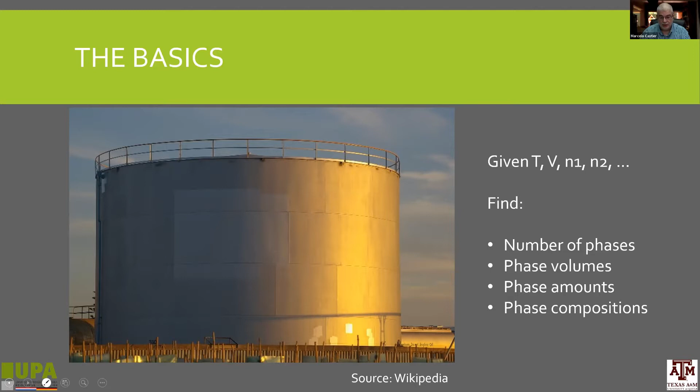For example, if you have a tank, but now this tank is leaking, so there is a leak from this tank. In a situation such as this one, in addition to knowing the properties of the fluid within the tank, the same properties as we discussed before, the phase amounts, volumes, compositions, and so forth, you also want to know the same information for the fluid that's leaking from the tank. So if I want to do a kind of forecast of what might happen during an industrial accident, this information is very important. I want to know the flow rate and the composition of what's leaking.

So to do that, in addition to solving a flash TV and flash, I also need other properties such as the thermodynamic sound speed, and I need a flash with specifications of entropies, amounts, and stagnation enthalpy, and I'll come to that later on. Where else does it matter?

For example, it matters when I'm trying to do compositional grading, depending on the approach that I take. Again, if I think that I know the volume of my reservoir, the temperature, assume it's isothermal, the component amounts within it, and I know the height of the reservoir, I can now account for the effect of gravity and calculate, again, the number of phases. In principle, I know the phase volumes and the amounts in phase compositions as functions of height, function of level, function of position.

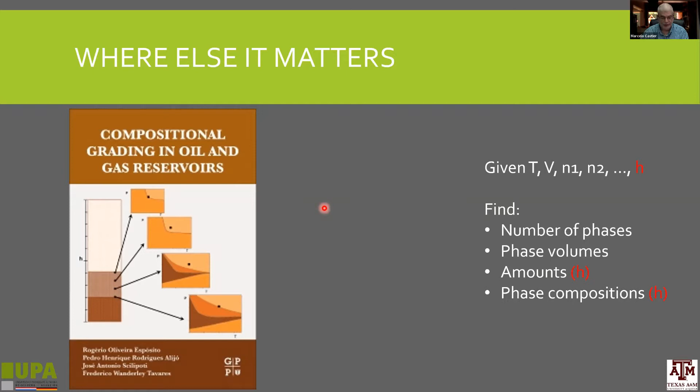In a problem such as this one, with specifications of temperature, volume, and component amounts, basic thermodynamics tells us that the state of equilibrium can be calculated by minimizing the Helmholtz energy compatible with the internal constraints of the system. Of course, the internal constraints play a role. If it's free, with no membrane or anything, then it will just be a kind of phase equilibrium with specifications of T, V, N, and I can solve this problem by minimizing the Helmholtz energy.

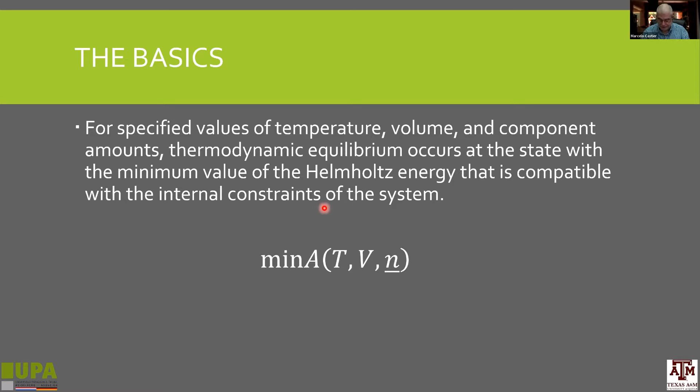But the problem of minimizing the Helmholtz energy is normally solved assuming a certain number of phases. If you assume, say, 2 phases within the system, then you find out what distribution of the components and of the phase volumes will minimize the Helmholtz function.

But it's not always the case that I know how many phases exist. In some cases it's trivial, in others it's not. For many years now, phase equilibrium calculations embed the phase stability test. In the case of the Helmholtz energy, we can derive this phase stability test using different thermodynamic potentials. Michelsen's work of 1982 used the Gibbs energy, but you can replicate that type of derivation using other potentials, starting with entropy, internal energy, or in this case an expansion of the Helmholtz energy.

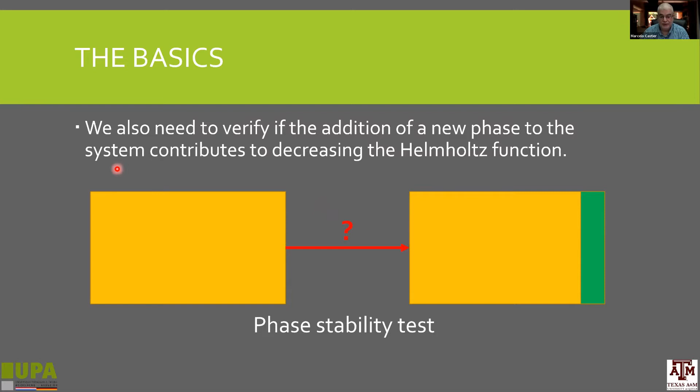So the problem is whether I can start with a one-phase system and then split it into a yellow phase and a small amount of a green phase, but conserving the volume. So I now have a constraint that the volume of the original system and of the system after partition have to be the same. This leads to a formulation of the phase stability test based on the Helmholtz energy.

If I have a way to minimize the Helmholtz energy and I have a phase stability test, regardless of the mathematical details of the implementation of each, I can start thinking about putting these elements together and creating some useful tool.

As, for example, a flash algorithm that would minimize the Helmholtz energy, accounting for the possible inclusion or exclusion of phases. The traditional way of doing these calculations is you start with a number of phases. I put here 1 because if you have a system with chemical equilibrium, you need to minimize the Helmholtz energy for a single phase chemical equilibrium. If you do not have that, then you don't need to minimize the Helmholtz energy for a one-phase system, because there is no alternative. But either way...

What happens next? If you start with one phase, you test the stability of the system, the thermodynamic stability. If the system is unstable, you add a phase to the system and repeat the exercise of minimizing the Helmholtz energy. Especially when doing calculations close to phase boundaries with systems with more than 3 phases, it's necessary to test for the possibility of eliminating a phase, which would lead to a decrease in the thermodynamic potential.

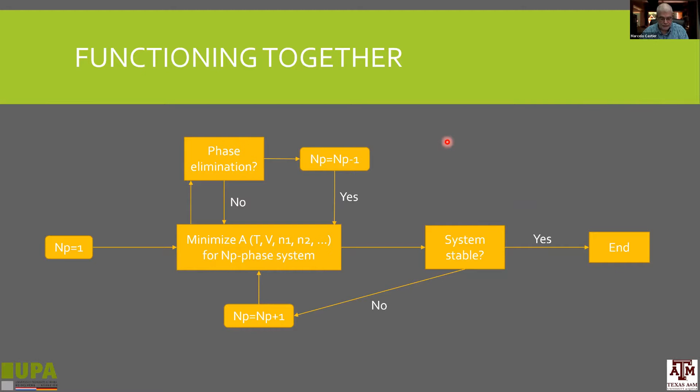As we move through this presentation, my goal is not to go deep into the details of the numerical implementations, but rather to highlight some points that lead to applications. The title had to do with applications, and that will be my emphasis, not so much the numerical details, but we can discuss them later if there's any specific interest.

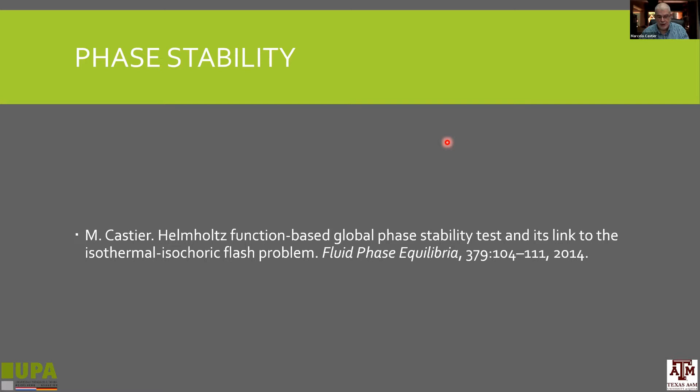Now on calculating phase stability based on the Helmholtz energy, what you can do is basically replicate the way it was done by Michelsen for the Gibbs energy in the 80s, accounting for the fact that you need to have volume conservation. Remember, the volume of the single phase and the two-phase systems have to be the same, so you have to account for volume conservation.

Then you have a phase stability function that is the difference of the chemical potential of the incipient, trial phase, minus that of the phase already present, times the amount in the incipient phase, but also you have this contribution that comes from the pressure difference. Now, regardless of whether you specify T, V, N or T, P, N, if a certain state is unstable, it's unstable, regardless of the specification you made.

In terms of identifying whether the system is stable or unstable, doing it the way shown on this slide, or doing it like Michelsen did and proposed years ago, you get exactly the same answer. You have to. If you don't, something is wrong, because regardless of the specifications, if a system is unstable, it is unstable.

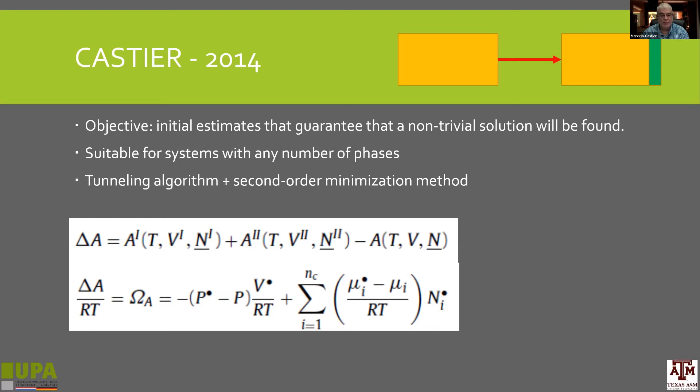So this is not how it was done here. It uses an empirical method called stochastic tunneling, combined with second order minimization. There's no guarantee we'll always get the minimum, but there's a good probability that it does.

In this work, I compared with another algorithm published by Professor Firoozabadi and his group, and got near perfect agreement with his results. There is one discrepancy: some of the results he showed in his paper with his group have not only transition from 1 to 2 phases, but also from 2 to 3 phases.

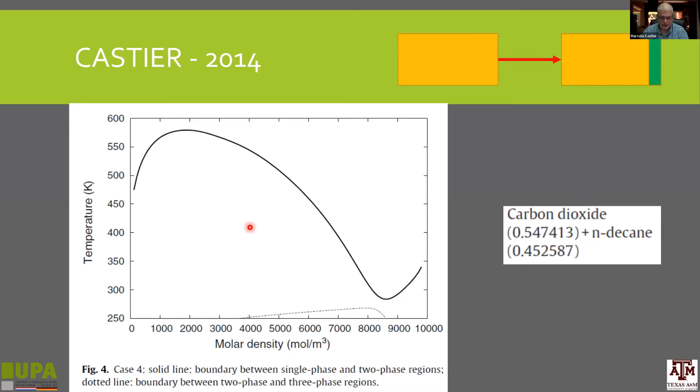This is one example with three phases. Here's another one that also shows three phases. I picked out those that had 1-to-2 and 2-to-3 phase transitions as the outcome.

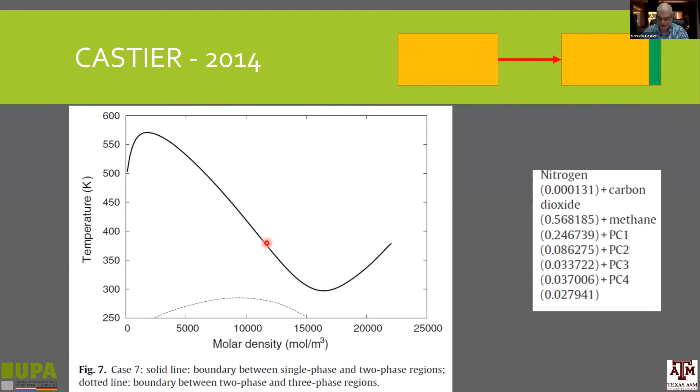Now, all of this started because of Rogério Esposito, who was a PhD student with Frederico Tavares and myself around year 2000 to 2005, this period, the early 2000s. He worked for Petrobras at the time, and still does, and he wanted to calculate compositional segregation. He became a very well-known specialist in this topic. But at that time, we wanted to do an isothermal calculation.

The way we did it was as a TVN flash, with the effect of gravity. If you have a smooth transition as the outcome of the effect of gravity, you need to integrate the value of dA over the whole region. This is essentially impossible to do analytically with any realistic or practical equation of state, so it has to be discretized. This was the approach we took: to create discrete layers and add the effect of each of these layers.

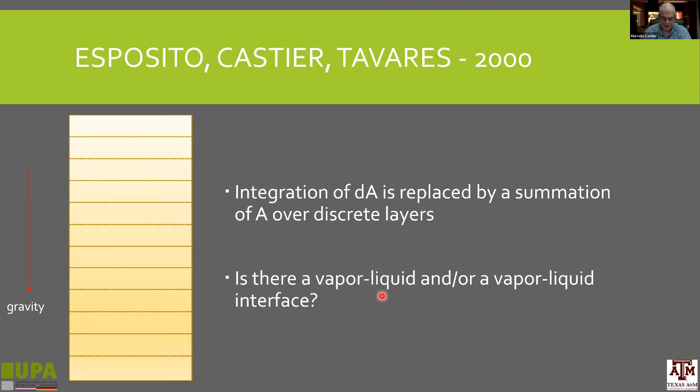Then there is the question: is there a vapor-liquid or a liquid-liquid interface? That's what we wanted to find out. So we wrote the Helmholtz energy of each layer, added the effect of gravity to the chemical potential, and added the effects of all the layers to get an approximation to the Helmholtz energy of the whole system.

Then we adopted a dual loop strategy. In an outer loop, we tried to locate the phase interface, using a very simple numerical method like simplex optimization, because we wanted to find out whether we had the vapor-liquid interface at this level, or maybe at this other level.

Why is positioning the level interface so important? It's very important because if the interface falls in the middle of a layer, the density of this layer will give rise to a negative pressure, for example, giving an unrealistic pressure profile. So positioning the interface exactly is of crucial importance.

The approach we took at that time was to have two loops. In one loop, we locate the phase interface, and then we discretize, creating discrete elements for the liquid and discrete elements for the vapor. We then use a TVN flash to find the distribution of the elements within the phases.

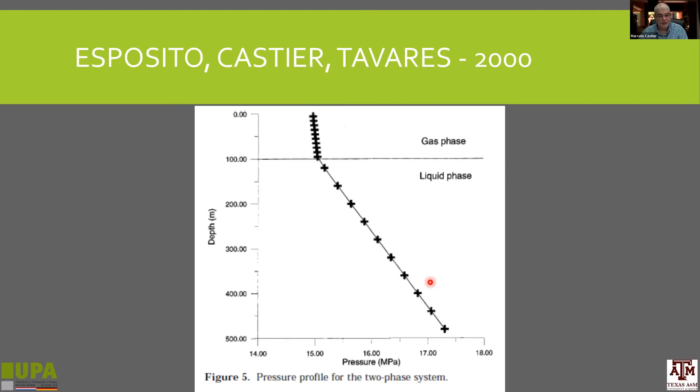These are pressure profiles with depth. Here is depth on the vertical axis, and pressure on the horizontal. We have very small pressure change with depth in the gas phase, and then when we cross the interface into the liquid phase, we get a much more pronounced pressure change. It looks like a straight line, as if the liquid were incompressible, but we didn't make that assumption—it just comes from the equation of state as it is.

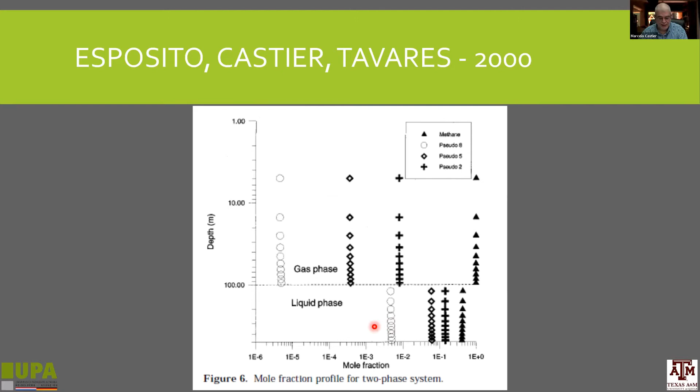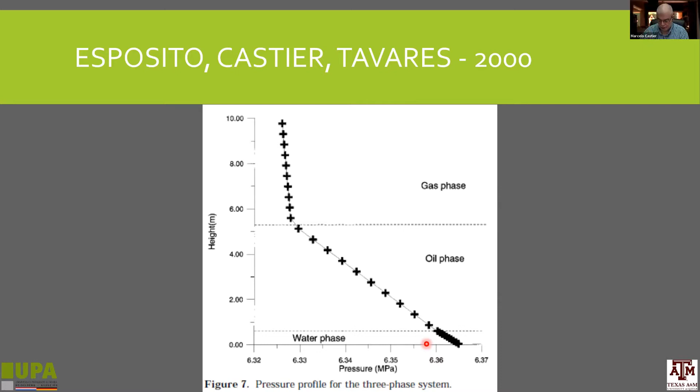Now, we had this tool, and a paper appeared in Chemical Engineering Science by a group in Shell Research, in which they did molecular simulations of gas centrifugation. The idea was to purify natural gas using centrifugation, and they did molecular simulations. Fred and I said, okay, we can do it with our program, let's do it.

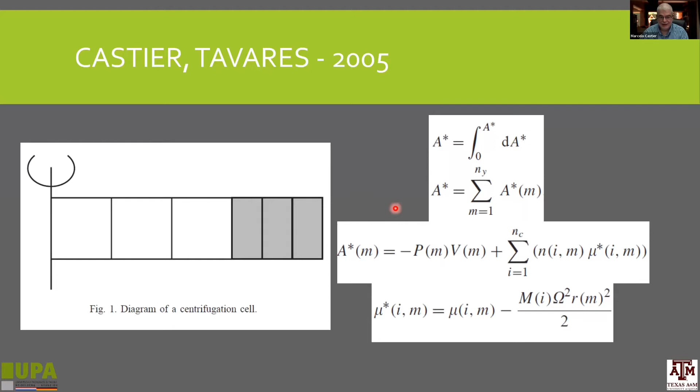We got the results in about 3 days. What did we do? We had a vertical cylinder, now we have a horizontal cylinder. What changes from one calculation to the other is how the effect of the external field—now a centrifugal field—affects the chemical potential. Off we go, using exactly the same idea, exactly the same approach. The results we got were a nearly perfect match with the results of molecular simulation from the Shell Research group.

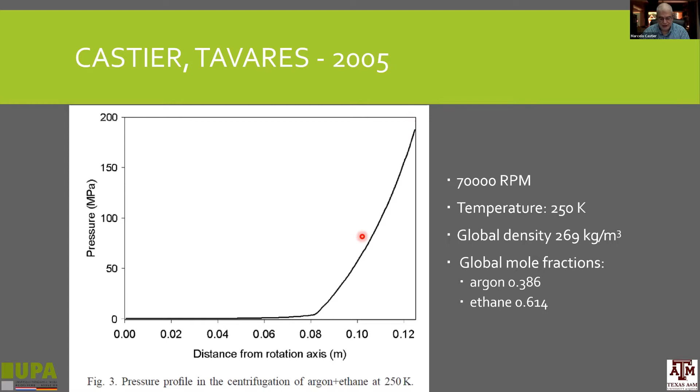And we could get composition profiles. The basic idea of using ultracentrifugation was that in the outer layer away from the rotation axis, you could get enrichment of the heaviest components—in this case hydrogen sulfide and carbon dioxide—and this is exactly what you see here. This was an immediate application of the work of Rogério, just by switching from a vertical to a horizontal geometry.

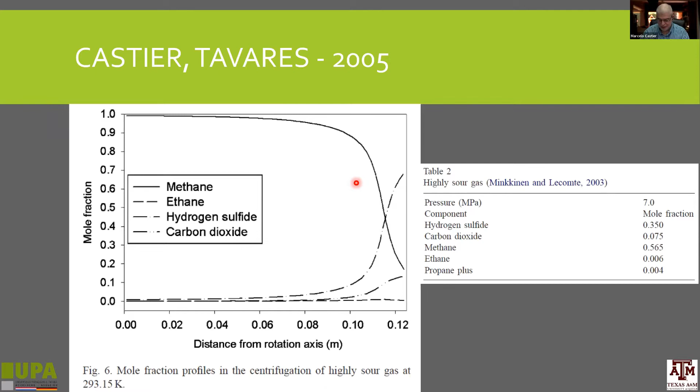Then we got excited and decided to go beyond hydrocarbons and play with colloidal particles, very small particles called Percoll. Percoll is used in biomedical separations—small particles of silica coated with a polymer. When you run a Percoll gradient, you separate different parts of cells, organelles.

I took this picture just as an illustration. I think these colored bands show how, depending on the density, the particles get together—they are separated essentially based on density.

So we formulated this. This time we used an equation of state for spherocylinders, developed by Professor Silvio Canuto of the University of São Paulo. He had just developed this equation of state.

We used this one, similar to the centrifugation problem, with one important difference: we made this calculation assuming we had the McMillan-Mayer system, in which our assumption is that we had a wall permeable to the fluid, to the solvent, such that it had a reservoir of the solvent, and then the solutes were modeled within by means of the equation of state.

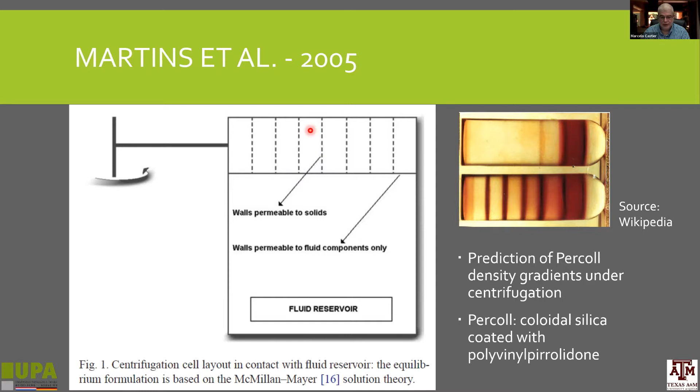Because of that, we had to use an effective mass for the particles, which was the mass of the particle minus the mass of the solvent that would be occupying the same volume—basically buoyancy.

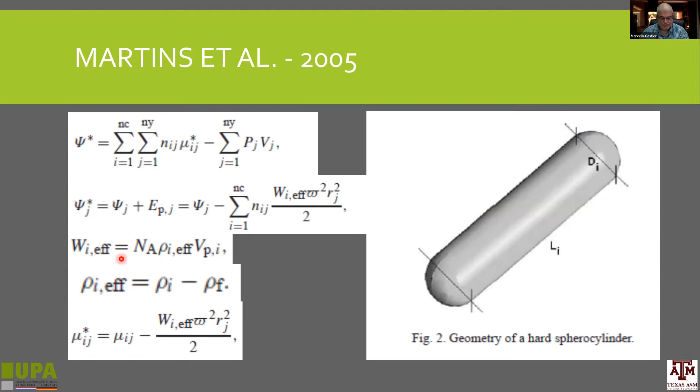Off we went with these calculations, and these are comparisons of the results from this sort of TVN flash with Monte Carlo simulations. The results for hard spheres here are essentially identical, with exceptions at the edges because of edge effects in the Monte Carlo simulation, but in the bulk of the system the match is essentially perfect.

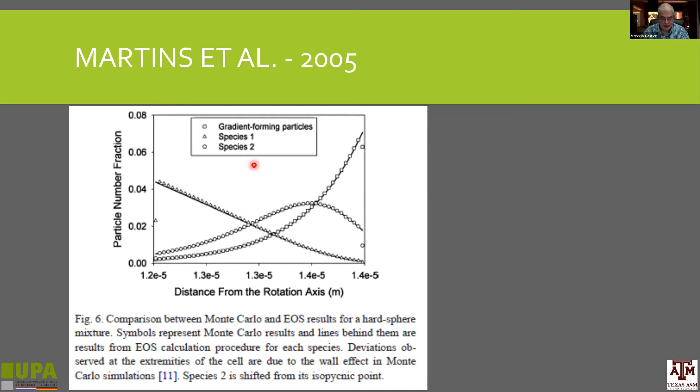This sort of banding that occurs in experiments—here we did a simulation. These are particle numbers against distance from the rotation axis, and here is the particle number of the Percoll particles, the particles that form the gradient. Here are different particles with slightly different densities and how they would create peaks, and that's exactly what we see.

Now, we cannot compare quantitatively—this is just a picture I took yesterday while preparing, so there's no quantitative comparison, but there's a qualitative comparison: you get peaks according to density. The least dense particles have a larger spread, and they become more focused, a narrower distribution, as the particles become heavier.

Everything just makes sense. Now, this program was used for many years, and then in 2016 it became so complicated to make changes—because so many people had worked on it, including myself—that it was really difficult, so we decided to have a new beginning in 2016.

So we wrote an entirely new code for volume-based calculations, allowing for multiple regions. For instance, if I have a porous material with a pore size distribution, I can say pore type A is a region, pore type B is a region. So I have this flexibility with dynamic memory allocation for different regions, different components, any number of external fields, more than one field in a given direction, and fields in perpendicular directions as well.

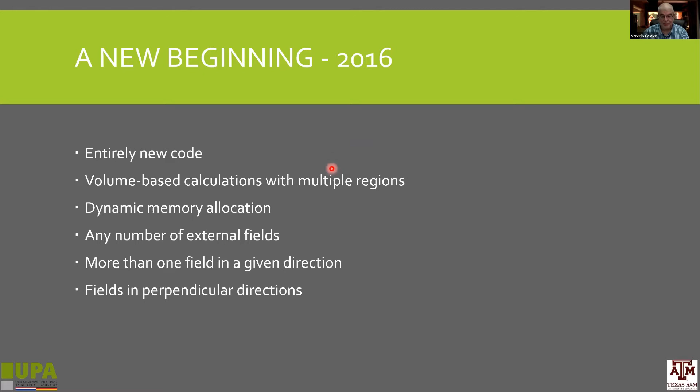We were megalomaniac at that time, and we called the program Mega TVN, the name by which it goes to this day—even though reality has shown it's not so powerful as originally intended, but the name remained. The first work with this was with Professor Yannis Economou and two Master of Science students.

So this was kind of a picture of what we had in mind: the ability to have, for example, the white region as a bulk fluid, a green pore, and a red pore—three regions—and the program can handle them all, including the possibility of gravity along with the effect of an external wall.

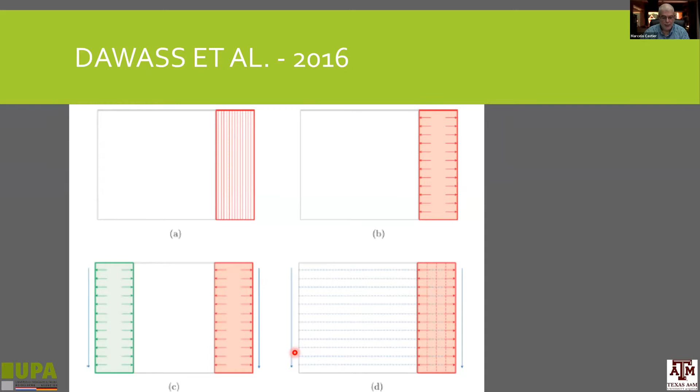In this development we also account for replicas. So again, a pore size distribution: I have a certain pore, and say 10 to the power 6 of that pore, and then another pore with 10 to the power 5—a different population of pores. All of this is accounted for, all these possibilities.

But again, it's the idea of adding the contributions of discrete layers of the Helmholtz function—discrete contributions of the Helmholtz function over layers, and now over regions.

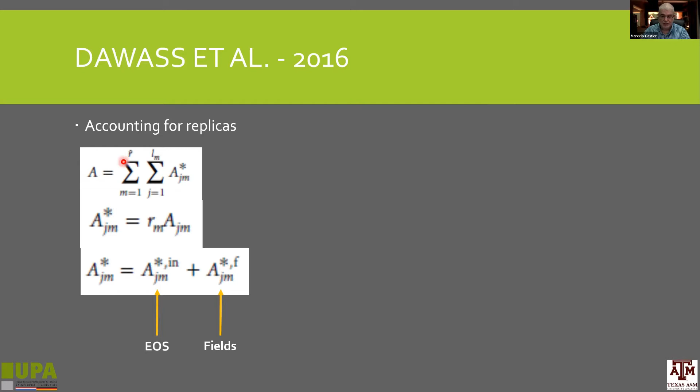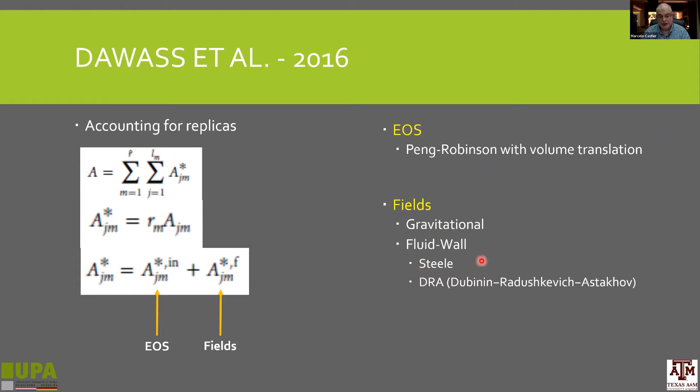In our work, we used Peng-Robinson with volume translation, and we considered two types of fluid-wall interactions and gravity. This is not actually what the program is meant for—it's not meant to be a replacement for molecular simulation, absolutely not. There are several severe limitations to doing that, but this kind of gives the qualitative idea of the type of result we get.

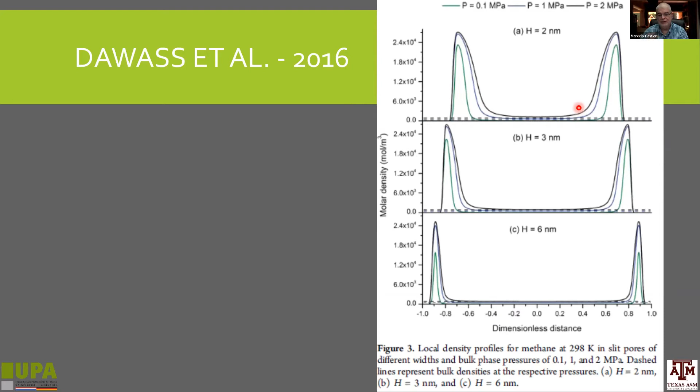So it gets an internal profile within the pore. Again, not meant to be a quantitative comparison, but it gives the right trend, points in the right direction. Now, what it's meant for is to compare macroscopic properties.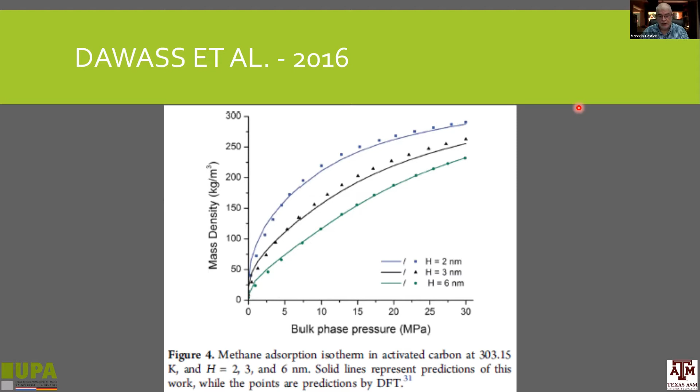Just for the sake of illustration, in this calculation we did, this particular plot is a result in which we used fluid wall interactions and gravity, so we had two fields acting on the system at the same time in perpendicular directions.

Here is the local mole fraction of CO2 within the pore as a function of distance from the wall at two different depths. So here we see the effect of depth and confinement together at the same time.

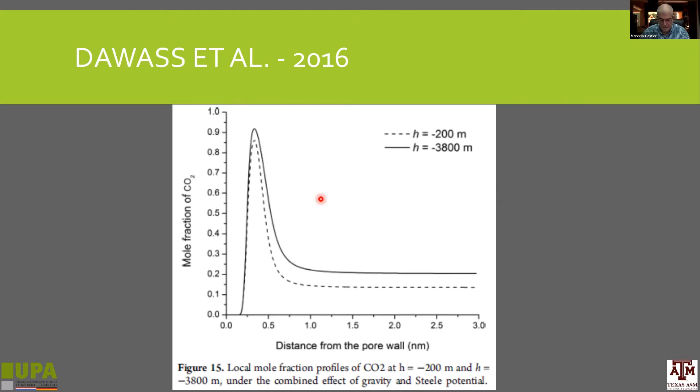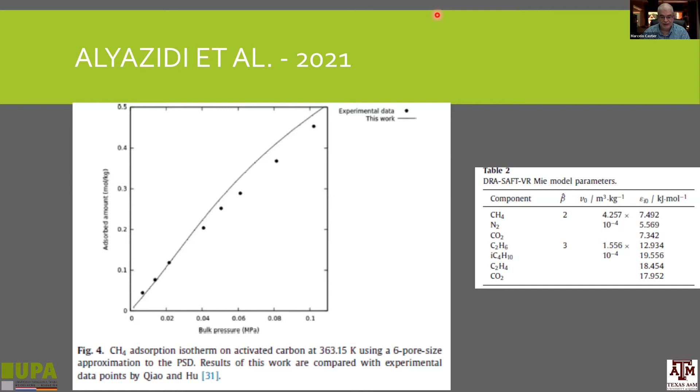More recently, we extended this work using the SAFT-VR Mie equation of state, and we have made comparisons with systems in which we took into account pore size distribution, so the ability of taking into account several regions. Here is an example of what we get for the adsorption of CO2 on activated carbon compared to experimental data.

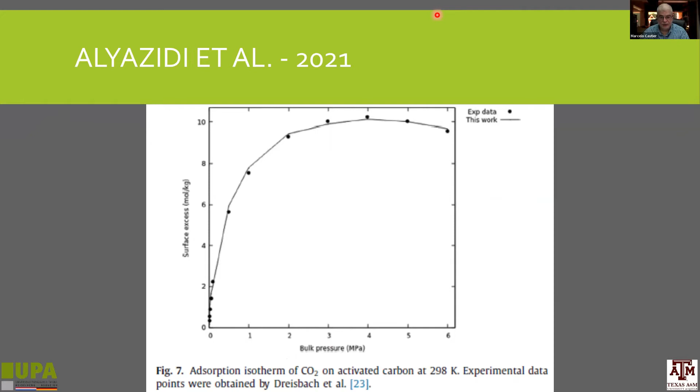Now let me move on to applications to process safety. Process safety is a very broad subject, very interesting, that goes all the way from applied psychology, trying to understand why people take safe or unsafe actions at the workplace and in their daily lives, but also includes very technical subjects. In particular, I have been working with Professor Luc VÉCHOT from Texas A&M University for a number of years on fluid releases from pressurized vessels.

There are two situations: you may intend to do that if you are opening a relief valve, so you have an overpressure and you want to relieve the pressure, or it may be an accident, an industrial accident. Either way, trying to understand what happens when there is a fluid release from a pressurized vessel is a very interesting problem of practical importance.

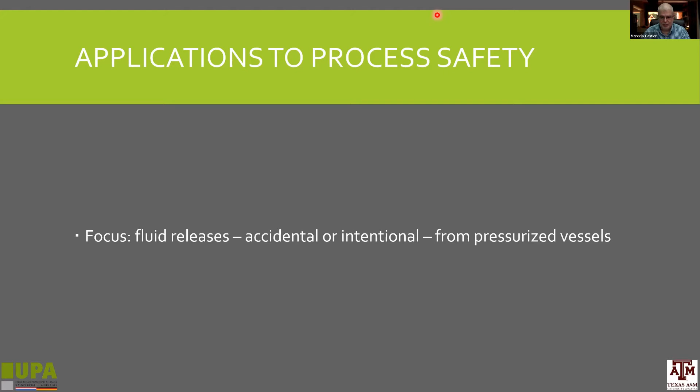Now, what I'm going to show you are some results, kind of the Lego bricks that went together into the simulation of venting and leaks from reactive and non-reactive systems.

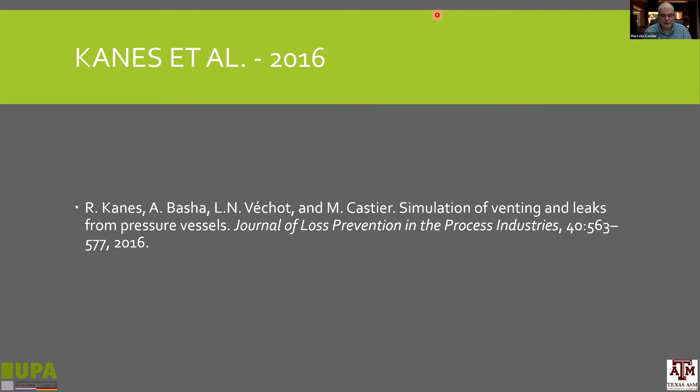The first thing that's not necessarily easy or obvious is to find out what phase is leaking. My drawing skills are terrible, I'm sorry for that, but I think this image still conveys the message. Suppose yellow is liquid and white is vapor. Let's say at the beginning of a leak, you have a leak from the liquid phase, and then as material leaves the vessel, there will be an interval of time where you have leak from both phases at the same time, and after a longer period, the leak will be from the vapor phase. This has a dramatic impact on the composition and flow rate of what's leaking.

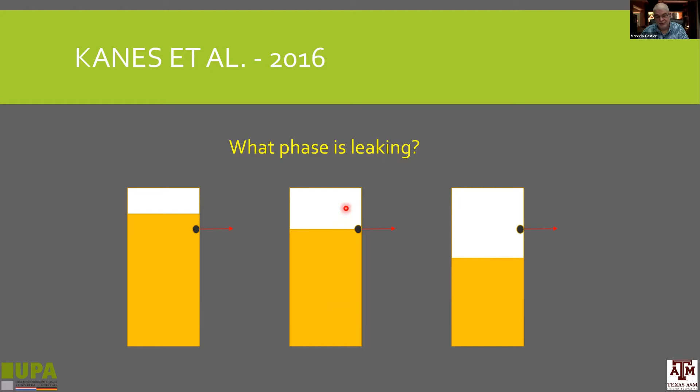In a vertical cylinder it's very easy, there is a simple relationship between volume of liquid and level, because the volume is the area of the base times the height. Not so easy when you have a horizontal cylinder, because the cross sectional area changes as the level changes, or when you have a horizontal cylinder with hemispherical or torispherical caps. So the relationship between volume and height is not trivial.

In some cases you need to do even numerical calculations. If you have the volume and you want the height, you need to do some trial and error, some Newton-Raphson calculation to find it out. It's not necessarily trivial.

Anyway, here what we did was first to formulate a mass and energy balance for a leaking tank. Let's think that the green streams are the normal operating streams, one feed and two normal outputs, and then there is a leak, which is the red output. I need to do a mass balance on a molar basis, so it's flow in minus flow out.

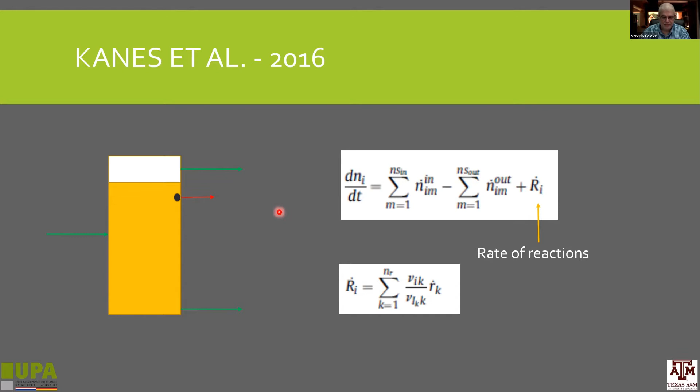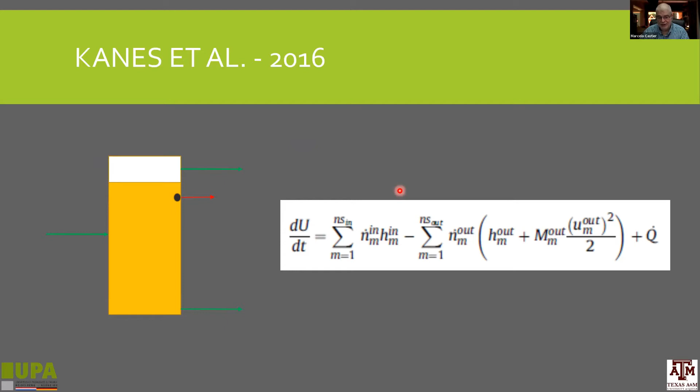If I have reactions in the system, there is a reason why this is very important or useful: now I need to account for the rate of reaction. So I need to write a molar mass balance for each component, a differential balance, and an energy balance, again accounting for the enthalpies of the streams coming in and out, and eventually some heat load. Specifically, I put the kinetic energy term in the outstreams because it may be very important, not so much for the regular streams, but for the accidental leak, as I will comment later.

Now, again, what I need to do is integrate a set of differential equations. I cannot do this analytically for the most practical cases, but the integration will give me, at each moment in time, the values of the internal energy, the component amount, and the volume is fixed. So I know U, V, and N.

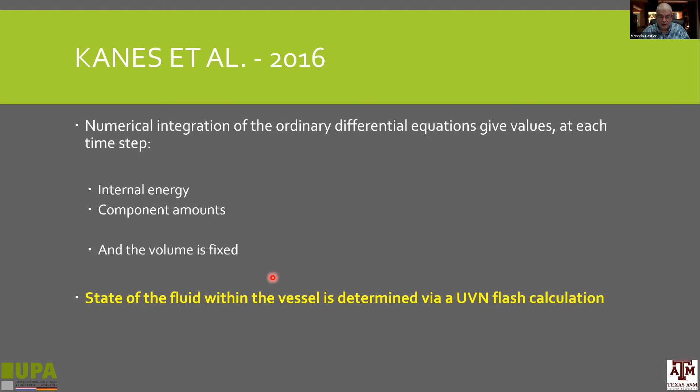If I assume that the properties within the tank are uniform, I have to solve a U, V, N flash, a flash that requires entropy maximization. I'm not going into the details of this calculation, but this was something I worked on in 2008, 2009, and this came out as a publication in Fluid Phase Equilibria.

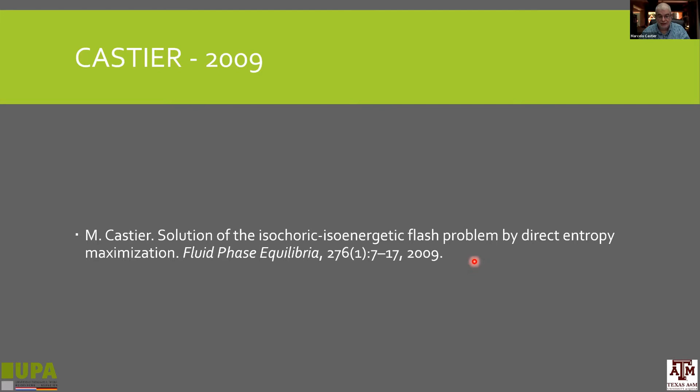Another thing that I need to worry about is the leak flow rate. The way it was modeled in this conventional model is to assume that the leaking point is at steady state, and it is a converging, adiabatic, isentropic nozzle. If this is the case, then the enthalpy of the fluid inside the tank has to be equal to the enthalpy of the fluid that leaves the tank plus the kinetic energy.

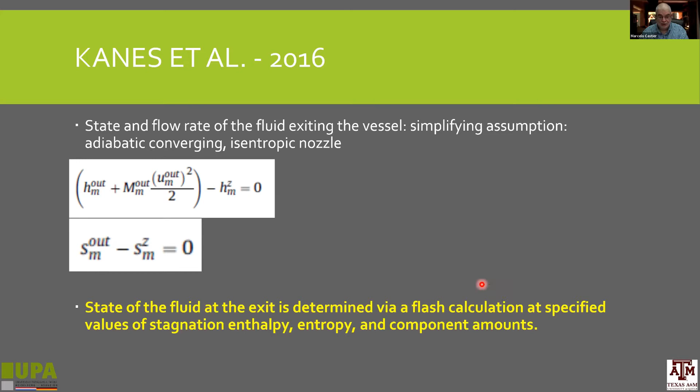Assuming it's isentropic, I have a problem in which I have an enthalpy specification, an entropy specification, and this is a flash with specified values of stagnation enthalpy, which is summation of enthalpy plus kinetic energy, stagnation enthalpy, entropy, and component amount—an HS flash. Because we had that problem, we set out to develop an algorithm to do that.

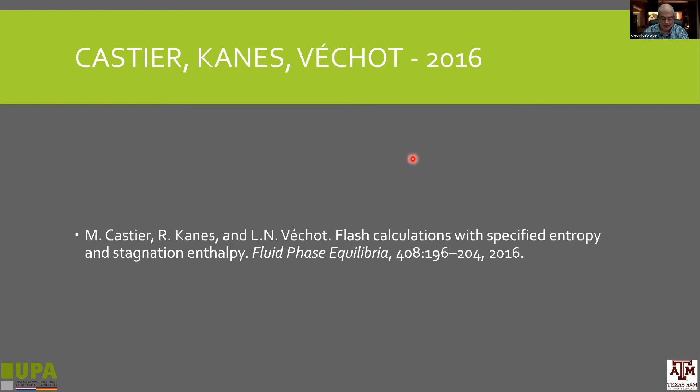I'm not going to discuss the details of the algorithm, but I may have two situations: a subsonic flow or a sonic flow. So there's energy balance, entropy, mechanical equilibrium, phase equilibrium with equal chemical potentials. If I have a sonic flow, the kinetic energy of the output stream depends on the sound speed, and the output flow may not be just one phase—it may have more than one phase. This creates the need for another algorithm to calculate sound speed in systems with more than one phase. It's like a chain of things you need to put together to simulate a leak from a tank, such as those we are trying to do.

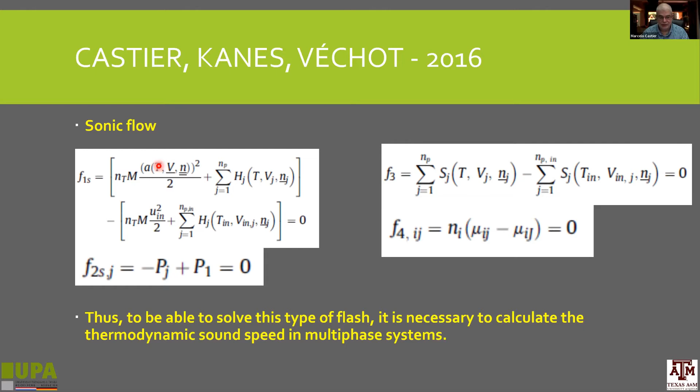So off we go, to calculate sound speed in multi-phase systems. In a single phase system, what you need to do is calculate the change of pressure with density at constant entropy. But in multi-phase systems, the volume is the summation of phase volumes, the entropy is the summation of the phase entropies, and the amounts are the summation of the phase amounts.

This creates a huge chain of manipulations that you have to carry out in order to calculate these derivatives. It takes quite a few pages to show the equations that need to be solved, but it can be done, and it works pretty well.

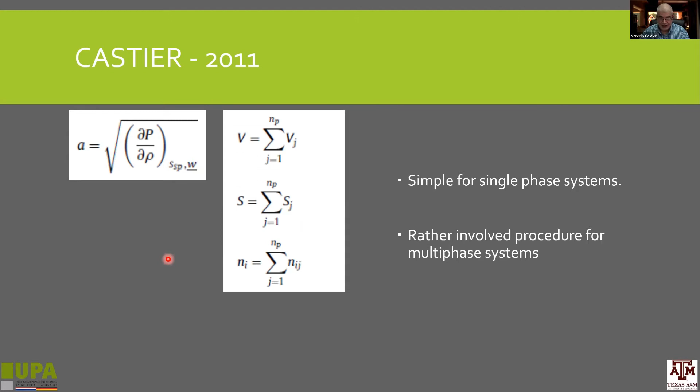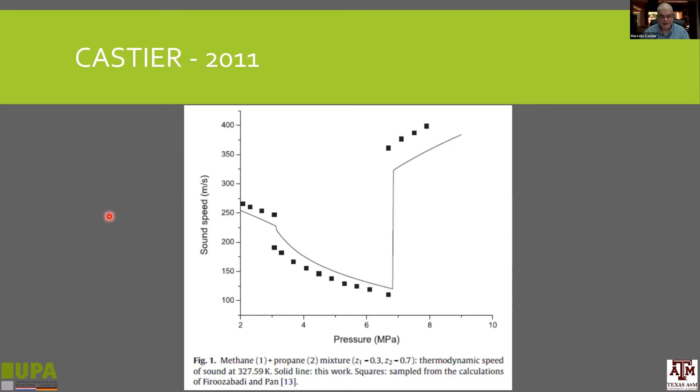It's very interesting—the sound speed may have some abrupt changes, and the algorithm captures this very well. These changes are the outcome of the fact that the compressibility of the system changes dramatically when there is or there is not a vapor phase in the system. So here are just some illustrations of this fact.

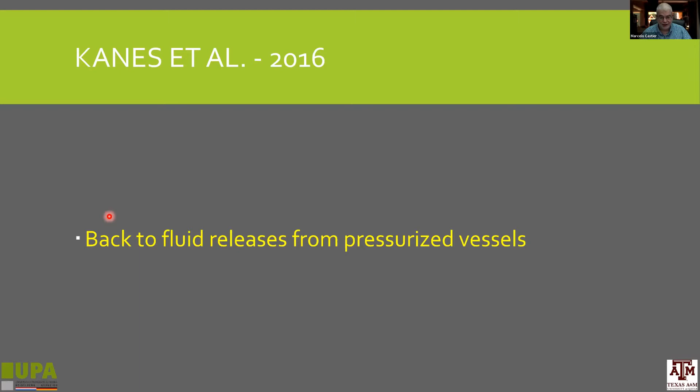Now, all of this had to be put together: UV flash, HS flash, sound speed calculations for multi-phase systems. When you have all of this together, we can go back to the fluid releases from pressurized vessels. Here are some results. This is just air, so there is just one phase—release of air from tanks. The simulations are the solid lines, and the dotted lines are the results of experiments.

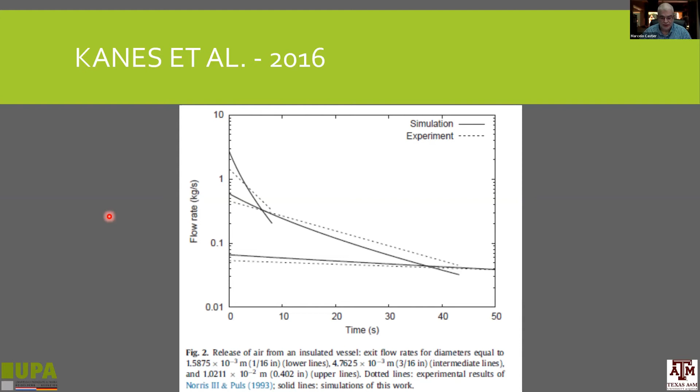Here is a rather complicated calculation based on an industrial accident happening in Italy, called the Viareggio accident, in which a train wagon capsized and leaked. Because it was an accident, there is no experimental data as such, but other people tried to model this, and we compared our results to theirs with excellent agreement. We calculated how the temperature and pressure changed over time during the leak. The leak was initially from the liquid phase within the tank, and then afterwards, because the liquid level lowered, at the end it was from the vapor phase.

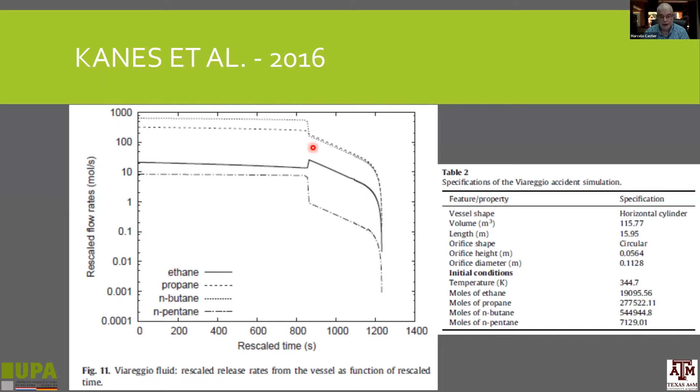Here, what I show you is time against flow rates. Take this line, for example—the flow rate of each component as it leaks from the system. Here it's leaking from the liquid phase, so the flow rates decrease, but not dramatically. Then at this point in time, it becomes a leak from the vapor phase, and the depressurization takes place very rapidly, with flow rates decreasing by orders of magnitude very rapidly. So all of this we could simulate with our process safety simulator.

Now, I mentioned that reactive systems were very important. The reason is because certain materials, like peroxide, DTBP, di-tert-butyl peroxide, are used in polymerizations, and these substances are very tricky, because you may leave them and almost nothing will apparently happen, but the reaction that forms acetone and ethane is exothermic. So if this decomposition starts, your products are much more volatile than DTBP, and the temperature increases.

So if it's not controlled, this is what you experience in your vessel: an exponential increase of temperature and of pressure. Here is the pressure curve. And very easily you can have an industrial accident if you don't take action. This simulation here was compared to experimental data, with very nearly perfect agreement.

Here is a simulation of what happens when you have a relief valve in your system. The relief valve opens, and here we have examples of 3 situations: opening at 0.4 megapascal, 0.45, and 0.5. If you have a valve of the correct size, you kill the reaction, because you discharge the reactor completely. Now, if the relief is not designed properly, you may have a situation in which pressure decreases, then it increases again. So that's why it's important to get it right.

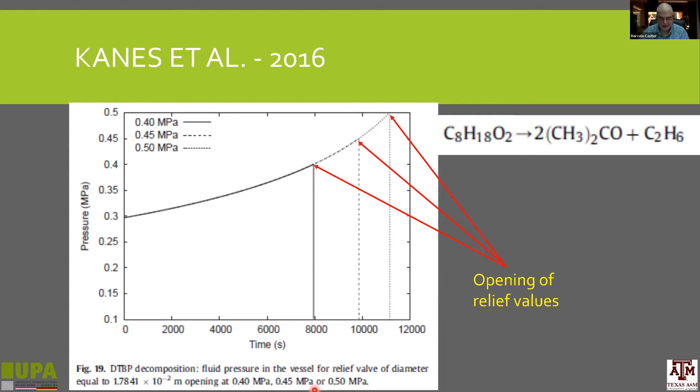Now, if you look at this curve, it looks as if it's just a vertical line down. Here we have magnified, this is temperature, not pressure, just a few seconds after the opening of the valve. And I have no way of telling whether this actually happens or not.

But in terms of the intricacies of the calculation, it's fascinating because here, the first leg, you have two-phase flow, and here it's wrong, it's one phase. Then this point of minimum up to here, it's one phase flow. And at this point, there's a transition from sonic to subsonic flow. So very complex behavior here. Again, I have no way of telling whether this actually happens or not.

Probably, I would say probably not, because in real life in an accident, this is a very messy situation. It's not as well behaved as the assumptions we have made, but we had to make assumptions to move on.

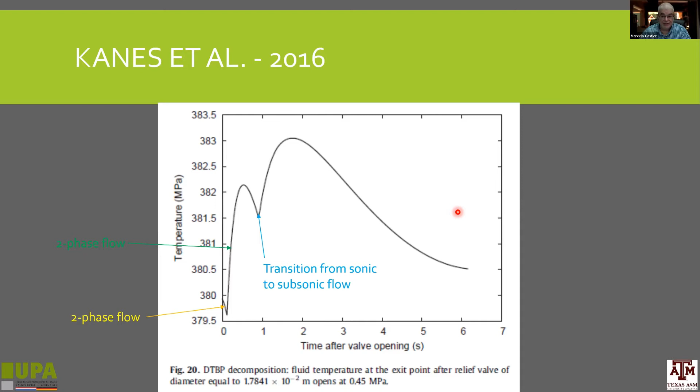Now, final set of examples, it has to do with supersonic separators. Because we had all these tools together, we could go into the simulation of supersonic separators. What are they? They are a piece of equipment in which, say, you have a feed from the left, a gas, and it goes into a converging nozzle, and then as it reaches the throat, if the conditions are right, it should be at sonic speed, and then as it expands into the diverging section, it becomes supersonic, and because the kinetic energy increases so much, the enthalpy has to go down because of energy conservation.

This causes a decrease in temperature and partial condensation if you have, say, a contaminated natural gas. So the heaviest components will typically condense, and you can design an output to collect the liquid, and you have a purified gas at the exit. So the claimed advantage of the people who design and sell these things is that they are compact and useful for inclusion in platforms. Petrobras, for instance, has an interest in this type of device.

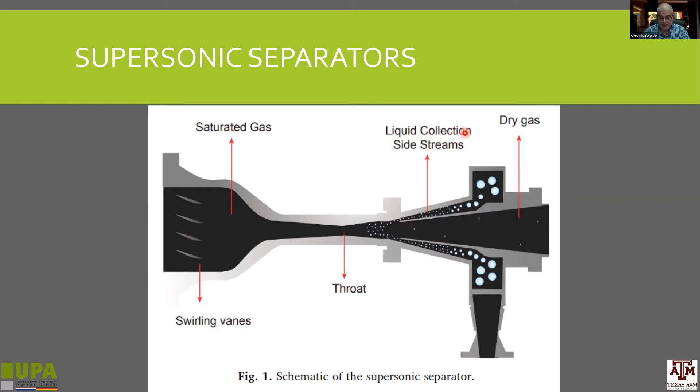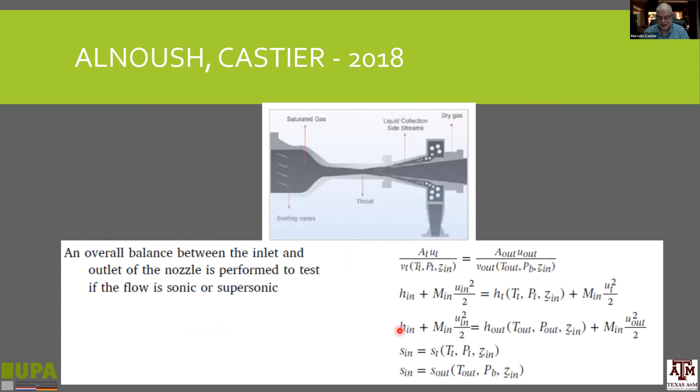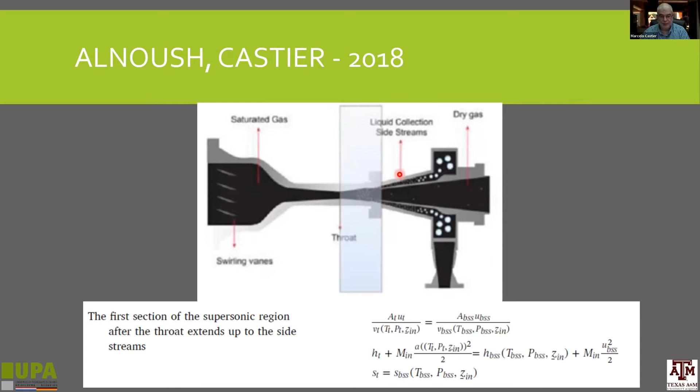Now, if you want to analyze this device, I put the equation here, but no worries, I'm not going into the details. You need to analyze first, to take a kind of big look at what's going on. Here what I have is mass balance, these are enthalpy balances, this is entropy. And you need to do this section by section between the entrance and the throat, and then between the throat and a side stream, the position where you have a side stream to remove liquid.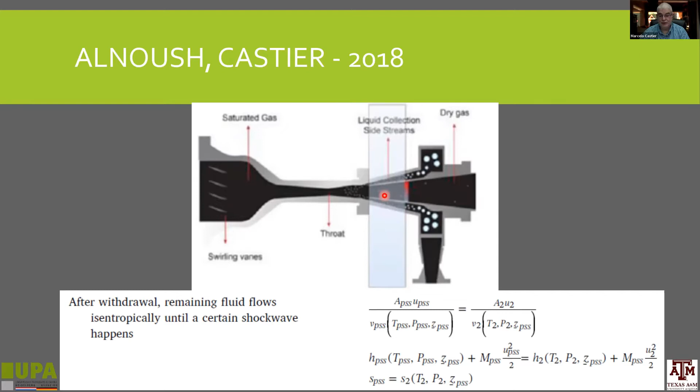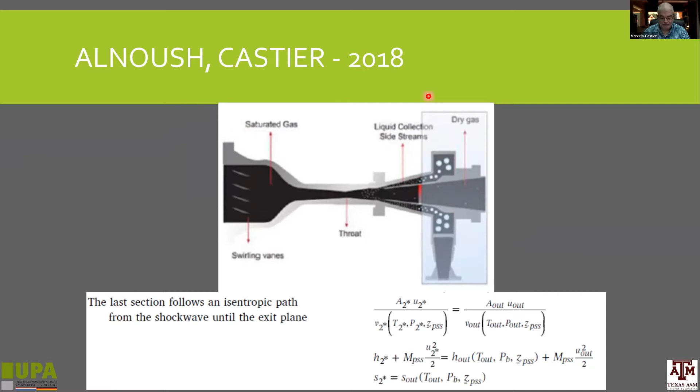And then inside this equipment, you normally have a shock wave, so you need to model the shock wave. The shock wave is not isentropic, and at the shock wave you need to use the momentum balance, and then after the shock wave, it's isentropic again. So you have HS flashes throughout, almost throughout the whole piece of equipment. So it's a playground for HS flash calculations.

Now, if you have a piece of equipment like this in a process simulator, say you want to add this to Aspen, for example, you don't necessarily care about the internal profiles.

Perhaps at the end, but not in the middle of the calculation. So what we set out to do more recently was to modify our procedure and just calculate the key points that are necessary to get the output conditions. These key points are the condition at the throat, the conditions at the shock wave, and the conditions at the exit.

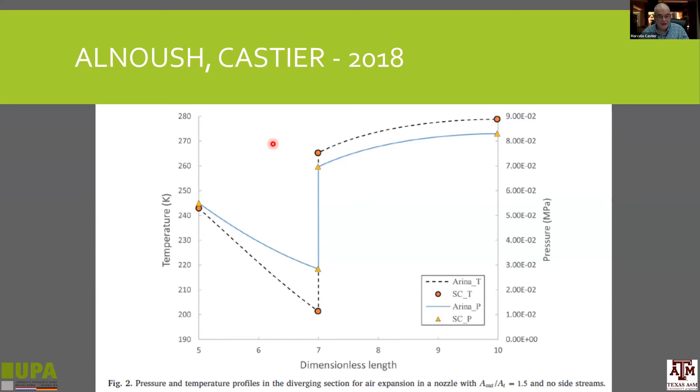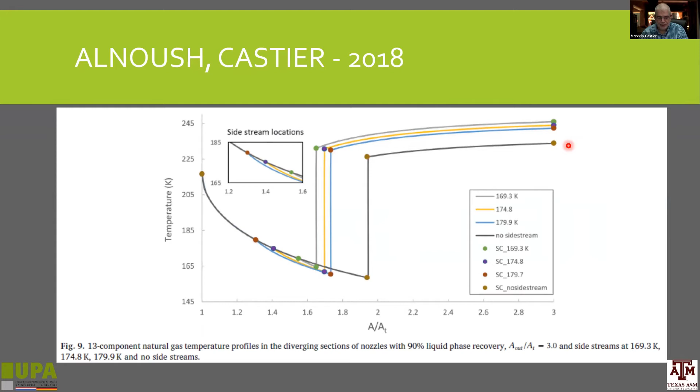By doing this, we could save a lot of computing time. So here are examples: this example has no side stream, and this example shows the effect of the side stream location on the output conditions. So we could do a lot of things much, much quicker than we could do before.

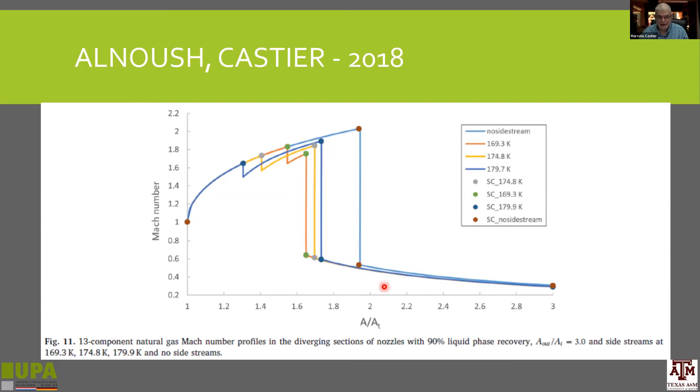So just examples of this: Mach number, speed of sound inside, so the fluid velocity divided by the sound velocity at each given position. And here, just a composition, how the composition changes between the feed and the gas that comes out for a given situation.

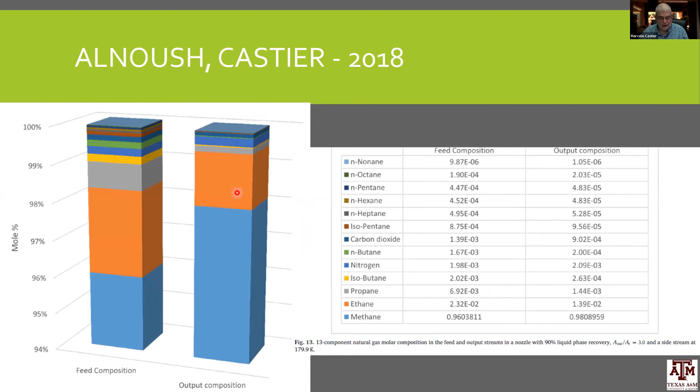Now, approaching the end, so what is my current work? I'm working with Frederico Tavares and a student, Tulio Freire, on phase behavior of fluids confined within small geological formations. I'm working with Luis Franco from Unicamp and André Gonçalves, PhD students, on the behavior of confined fluids under the effect of gravity, revisiting that problem and going deeper into it with some deep questions, at least to us, trying to understand several things.

We are working on liquid swelling inside these tanks and process safety calculations. When the tank opens, there is bubble formation, and the liquid rises because it's liquid plus gas inside the phase. So this has an impact on the rates of the releases. We are modeling this. A student just defended a thesis last week, and we gave a kind of partial answer. We're not entirely happy, we expect to make some progress in the coming months, and we are also working on uncertainty, the effect of uncertainty on the design of supersonic separators.

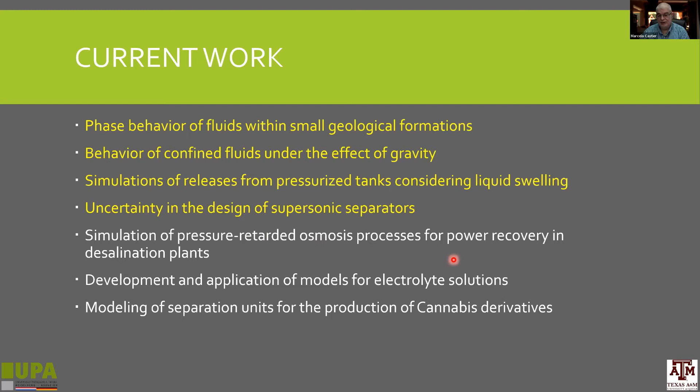So these are topics that are somehow related to what I presented. In addition, I'm working on the simulation of pressure retarded osmosis, a technique to recover mechanical power from desalination plants, which is an application of equations of state for electrolyte solutions. I'm also collaborating on a European project on the development and application of equations of state for electrolyte solutions, and I'm working on the modeling of separation units for the production of cannabis derivatives.

The people. Now, quite often we see presentations with a picture of everyone in a group. What I presented here is the outcome of more than 20 years of work, and it's just impossible to mention everyone. What I would like to say is that I remember each and every one of those projects and the people who worked on them, and I'm sincerely grateful for their collaboration, which was essential to accomplish what was shown here today.

Some final and random thoughts on the challenge of using complex models for the applications I have shown. I would like to illustrate this with what I call the IKEA syndrome. IKEA sells furniture, and you go to the shop and see a piece of furniture, and it is useful, it is practical, it works well for what I need, and I want it.

And I buy it, it comes, I take it home in a box, and then I'm faced with the challenge of putting it all together. And when I come to this point, then I need to think: do I really want it?

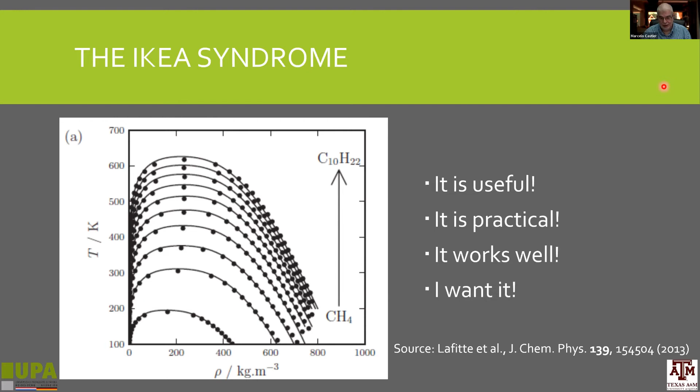Now, if we look at this plot, a beautiful representation of the volumetric dependence of hydrocarbons from the work of Lafitte et al., it's useful, it's practical, it works well, and I want it, until I take the paper from Lafitte et al. And these are part of the equations, probably at least an equal amount of equations, if not twice as much, needed to implement that. And then I ask myself, do I really want it?

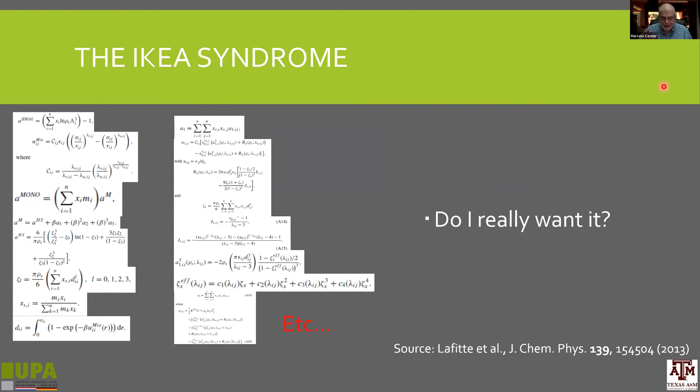Now, in all fairness, I am guilty as charged. If I look back, my own papers mostly fail at presenting information in an easy to use way, so I am not doing better than anyone else. In fact, the example I took from the paper of SAFT-VR Mie is to a large extent unfair, because they did an excellent job trying to make life easier by including an appendix with all the equations necessary to model it, but not necessarily in a way that's easy to use. So everyone, and I have talked to many people who have implemented SAFT-VR Mie, still it takes a lot of time to navigate through the jungle of formulas.

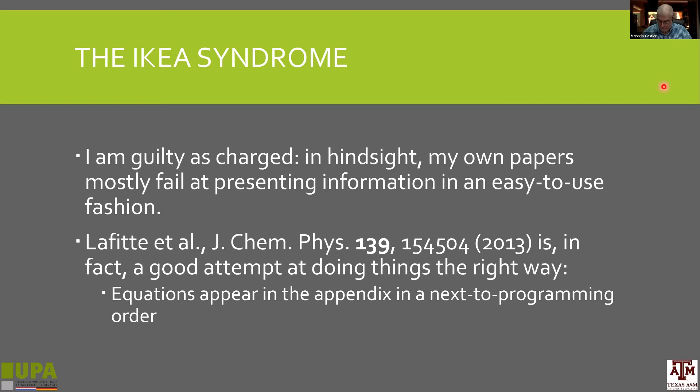Complexity will not go away. We model complex phenomena. We should not expect our equations to be simple. They will not be simple.

What we need to do, I think, is to make a better job at communicating what our model is. I think we do a pretty good job, mostly, in terms of presenting the model so that people can understand how the model is built, or the logic. I think it's great, but I think there should be ways, maybe nowadays there are these papers in which you can add something like supplementary material, like a guideline, step by step, how to implement these very complex models. I think these would be very useful.

I know I have an editor of Fluid Phase Equilibria here in the audience, and I think this should be something that we... here is a suggestion.

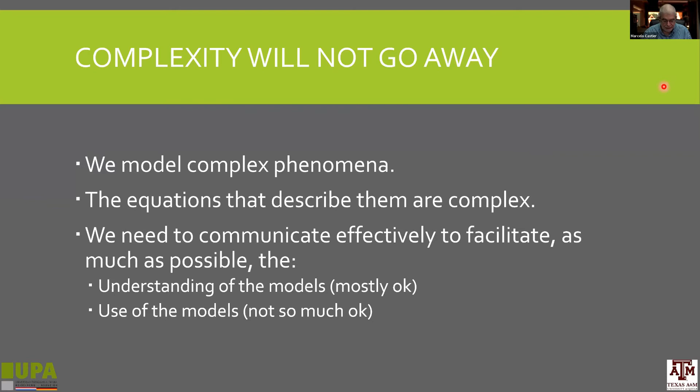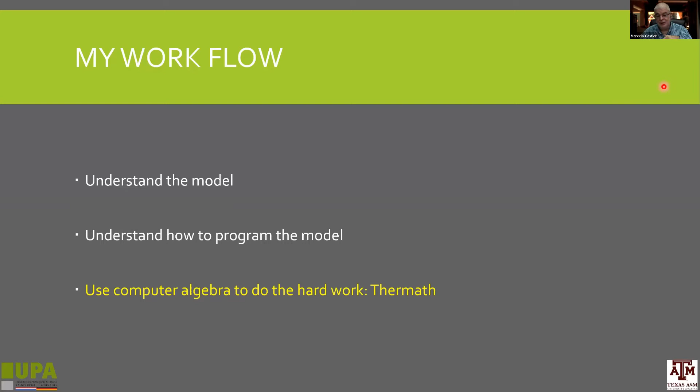My personal workflow for a number of years: I try to understand the model to the best of my ability. I try to understand how to program the model, but for many years I have not programmed models myself. I just use computer algebra to do that. I think that if you know how to use computer algebra, especially for young people, if you spend some time learning how to use Mathematica well, Maple well, it pays off. It's an investment, an initial investment of time, but it will make your life much easier further down the road.